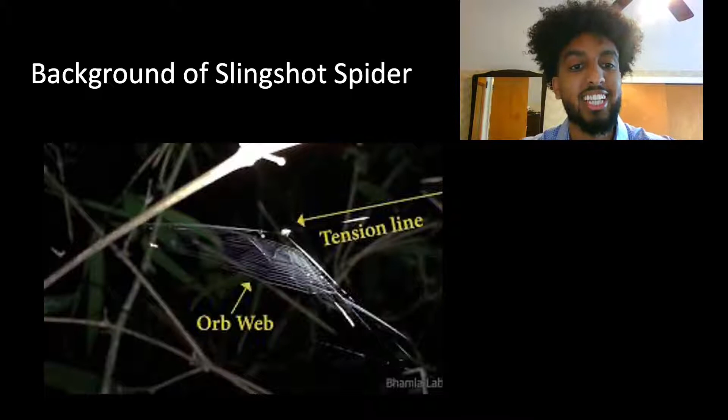The spider also anchors the web as it pulls it back, and it is found that the total displacement of the web is a primary source of the elastic energy storage. This concept will be explored in further detail in later slides. Now let's talk about how we can reproduce this web mechanism in real life.

Hello, my name is Tom Bates, and I'll be discussing Design Option 1. The main feature of this design is the hexagonal sling mount at the front that allows for the installation of a web-like slingshot system. The back end features a square plate to later bolt on a winch mechanism for the purpose of pulling back the web and maintaining tension until firing. The entirety of this frame is made of 3/4 inch aluminum square stock.

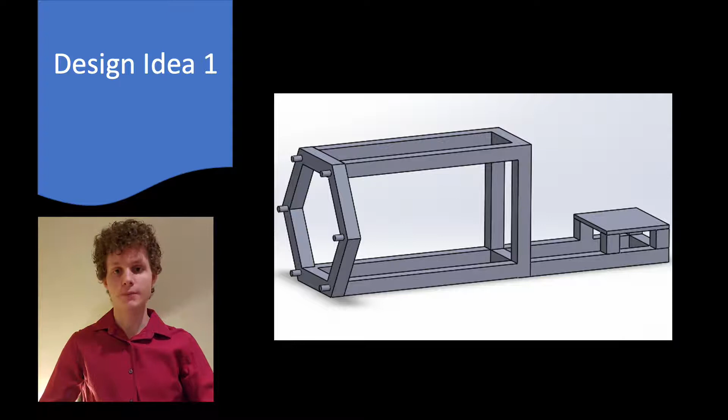Hello, my name is Gunnar Waldvogel, and I will be talking about Design Option 2. Design Option 2 takes inspiration from a crossbow. It uses a trigger mechanism and a linear set of lines instead of a conical web design. This also features a ratchet similar to our other designs, and this one has a foot design to help it sit on the ground or any unsturdy surface while shooting, to help minimize movement. This design would most likely be made out of wood and maybe metal.

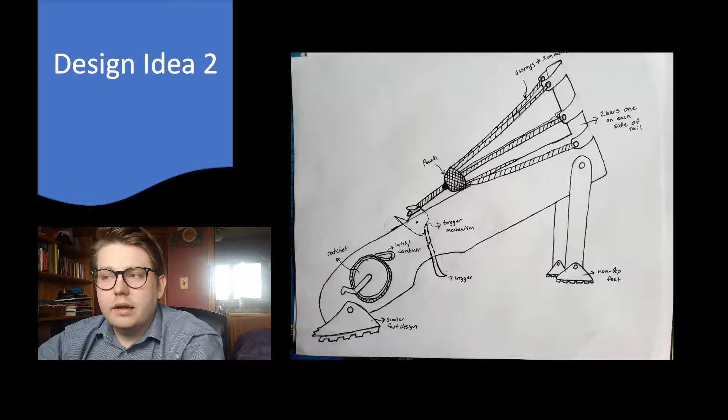Hi, I'm John Garrigan. Today I'll be discussing Design Idea 3. The main feature of this design is that it would have a hinged base that could vary the angle of launch, using some sort of motor. It also features a circular frame at the front that would hold radial lines and attach that to a mesh or cloth-like pouch.

This pouch would hold the projectile, and this system would be brought into tension using a pulling mechanism such as a winch. To release the tension, a trigger mechanism will be used, allowing the projectile to be launched. This design idea was one of our original ideas, and it helped us brainstorm other ideas.

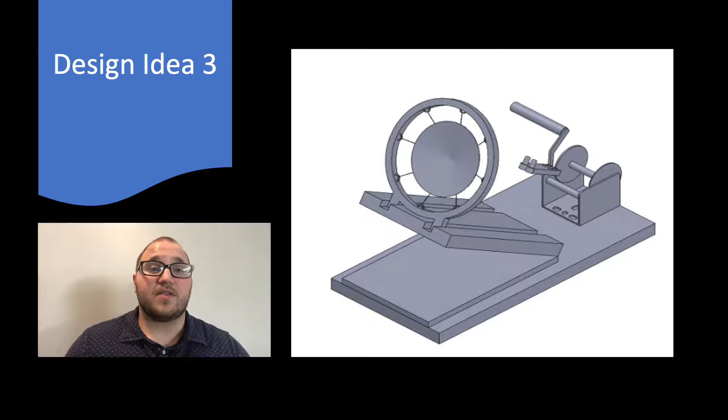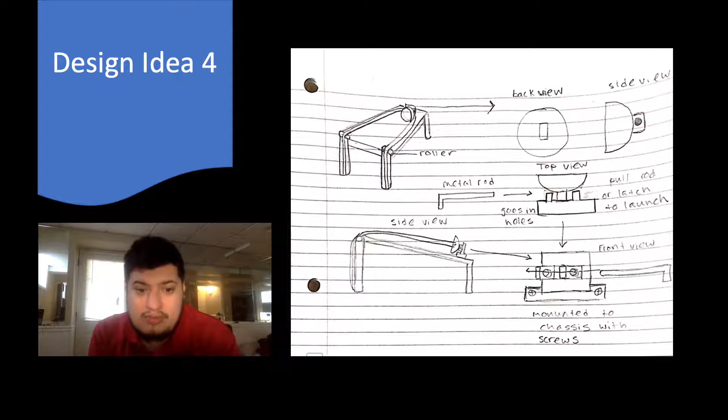Here is Design Option 4. I was going for a slingshot, somewhat similar design. It features kind of like a pocket to hold the projectile that would be launched, had a basic latching mechanism to it, and it was able to theoretically reach more pullback due to the roller design implemented at the front of the build.

Next, we created a decision matrix in order to rank our ideas. The ranking was broken up into 4 categories: safety, performance, reliability, and build difficulty. Performance held the most weight for us because high acceleration was what we were striving for. Reliability was not a major concern as we were only tasked with creating a proof of concept. The designs could all be manufactured if chosen. Therefore, build difficulty did not hold too much weight for us.

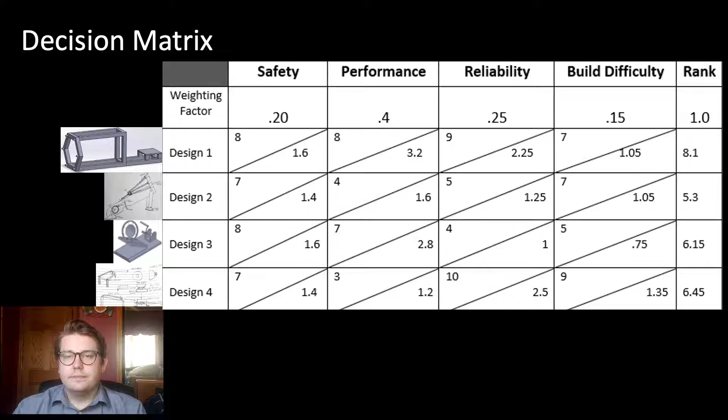From there, we ranked each design as a team, and then decided that Design 1 would be the one moving forward. Now that we established which design was chosen, let's go over the revisions. Figure 1 shows the original design chosen by the decision matrix.

In Figure 2, the final design, the first revision is a diagonal support bar instead of square to increase support to the web mount. We also changed the material from aluminum to steel for easier welding and increased the thickness to 1 inch due to it being more readily available from suppliers. The screws on the web mount were changed to eye bolts for easier attachment.

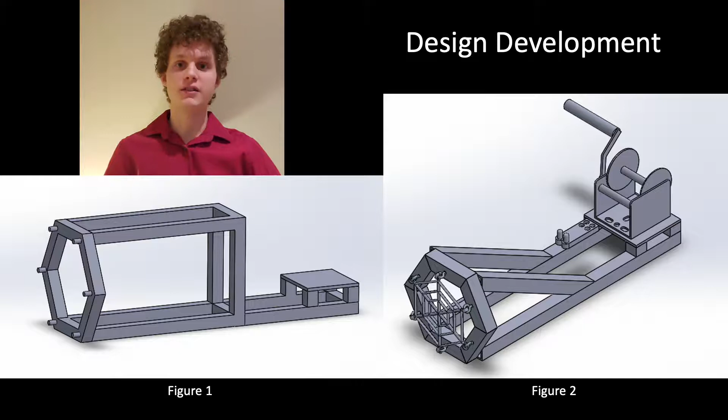And finally, we decided to buy the winch and quick release mechanism from a supplier instead of making it ourselves to save time in the building process. Next, we will discuss the web mechanism.

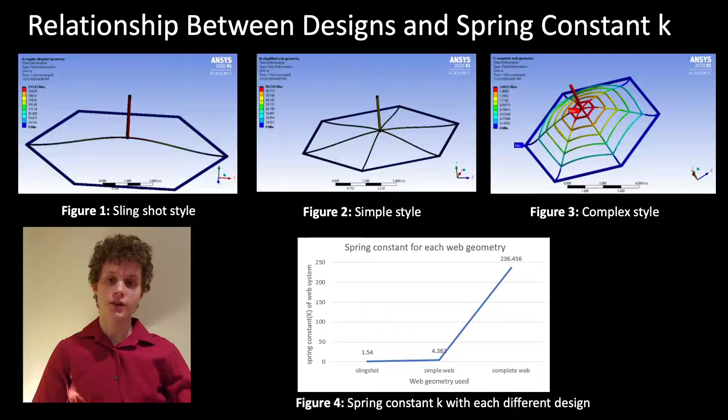Hi, my name is Justin. Today I'm going to talk to you about the material selection for our web design.

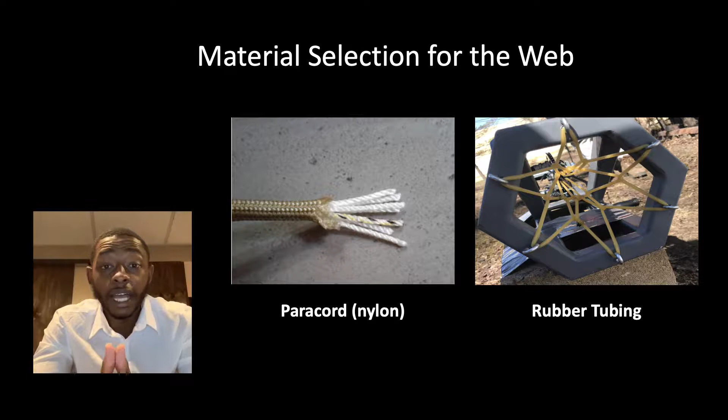We had two options originally: the first was paracord, and the second was rubber tubing. The paracord has a 30% elongation requirement, and once we got our hands on that, it turned out not to be enough for our project to satisfy it. That's what led us to using the rubber tubing instead, which has varying elongations, and this allows us to actually test the pellet velocity with different elongations in that web.

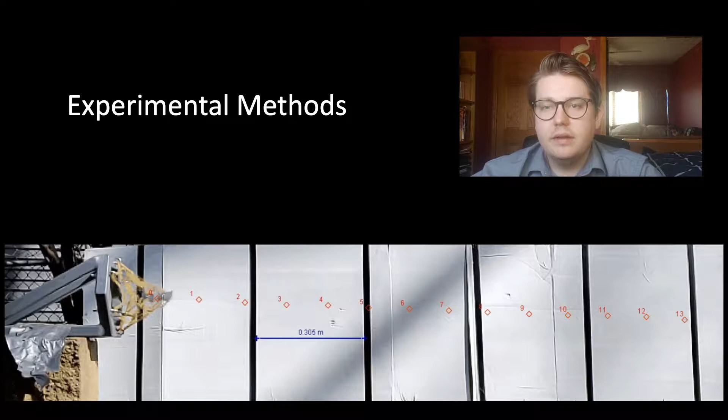Then, given the time of each frame and the distance traveled in each frame, we could then calculate the velocity of the projectile. Now I will talk about how we obtained and analyzed our data.

We did two different web designs and did two separate trials for each design. We used a Galaxy Note 10 to record each launch and tracker software to analyze the video. This allowed us to obtain a velocity, which then allowed us to calculate the acceleration with the equation you see.

If we compare our web design's acceleration to the slingshot spider's acceleration, you can see that the acceleration we got was much higher than the slingshot spider's acceleration. Our original goal was 1/10 of the acceleration of the slingshot spider. We exceeded that goal, and it just shows that this is not an effective way to compare.

The slingshot spider is very small, and if you scale it up to the size of our web design, we're not really sure if our design would be better or worse. To fix this problem, we decided to look into the energy density. The energy density is the elastic potential energy in the web divided by the mass of the web.

To do that, we first had to find the spring constant. This was done by measuring the force and dividing by the displacement. Once that was found, we were able to calculate the potential energy in each trial, and then dividing by the web design's mass, we were able to get the energy density.

The slingshot spider's web has an energy density of 3.92 kilojoules per kilogram. Our highest energy density is web design 1, and it has an energy density of 0.72 kilojoules per kilogram. We are 1/5 away from the slingshot spider energy density, and this just shows that we exceeded our goal of being within 1/10. This is a much better way to compare it instead of acceleration, because it accounts for the size difference between our web design and the slingshot spider.

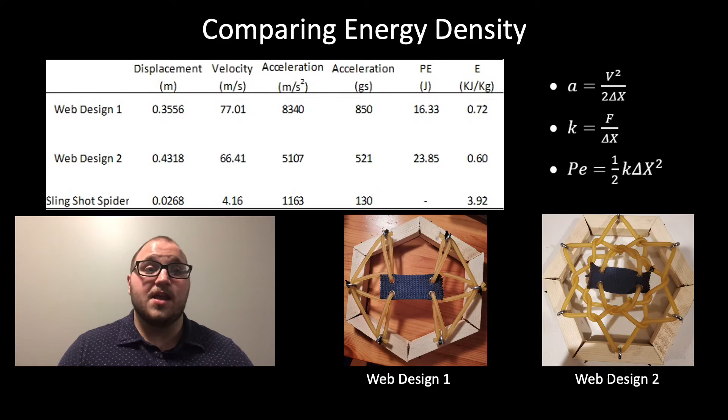So in conclusion, we explored the background, designs, various redesigns, calculations, the video analysis, and the data analysis. And we proved that we exceeded our initial goal, which was to reach 1/10 the acceleration of the spider. Thank you.